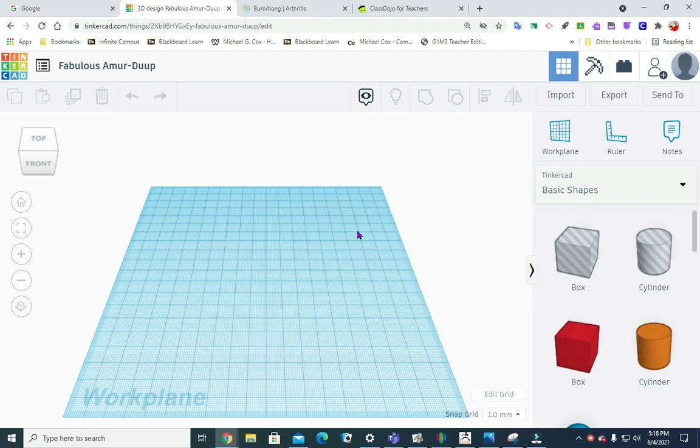But we're going to go create a new design. First thing we're going to do is go down to edit grid, and we are going to make it into inches. Then we're going to name it - let me double check. Nope, I didn't change it. Edit grid, inches, update grid. Then I'm going to go up here and name it, let's name it pillars.

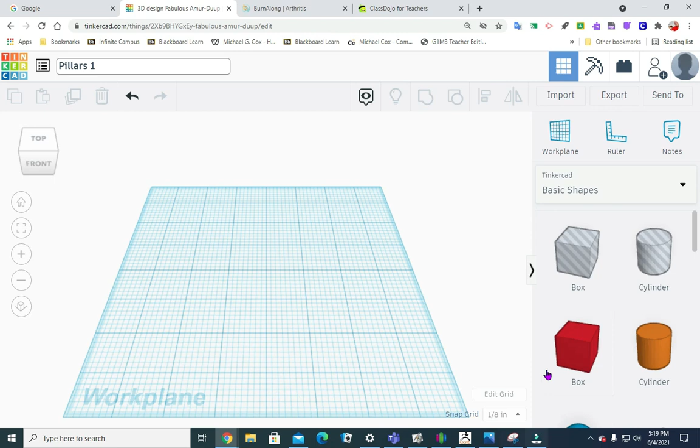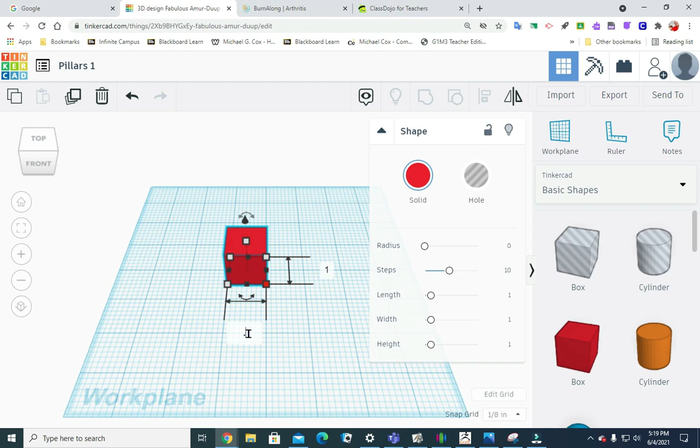I'm putting a 1 next to it because we're probably going to have to do multiple attempts at this. So we have the height of our pillars, and I am going to pull out a box. No, sorry, let's do our width first. It's a square, and it was 16 3/4 inches, which translated into 1 foot equals a 1/4 inch is 0.35. It's gonna be skinny. We're going to change both of them to 0.35.

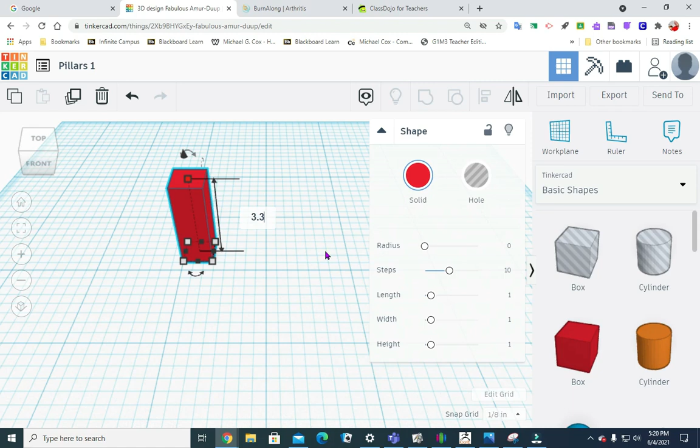Okay, now I'm going to roll in just so I can see better. It still is only 0.35 inches. The height is 3.3 inches. So now I'm going to have to roll out so I can see everything. So that is the pillar in and of itself.

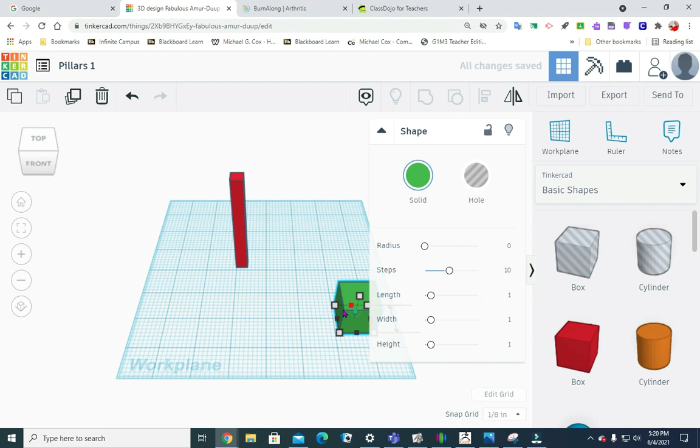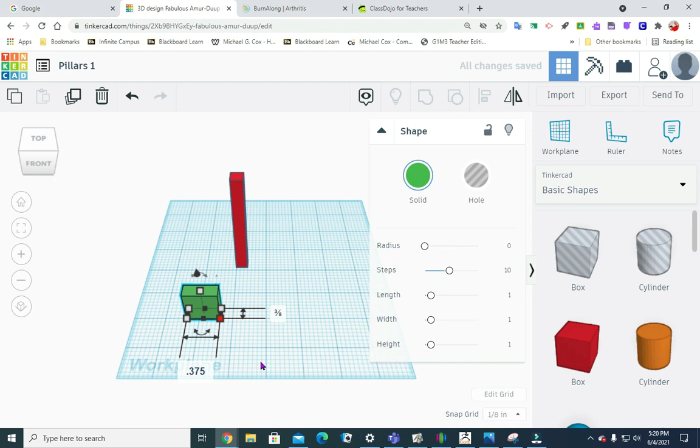Now what we need is to make the bases that go on the top and the bottom, the other little piece. So we're going to pull out another one. I'm going to change the color just so I can differentiate between the two. So this base is going to be 0.375 square. So it's 0.375, and I'm going to change this to 0.375. Okay, let's see, how tall is that?

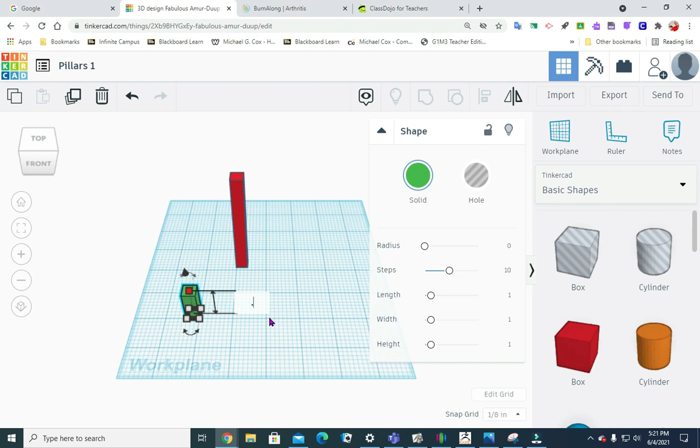We determined that was - let me double check here. Oh, I may be missing a measurement here. I'm sorry, it's 7 inches. So we're gonna make that 0.7 inches - so we are going to make that 0.15. Now it looks really tiny, right? It does, but in comparison, it is.

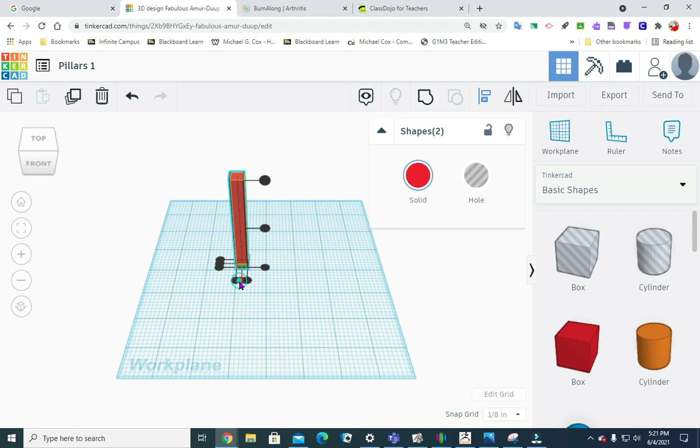So I'm going to pull this over, and I'm going to put it underneath that, and what I'm going to do is align it. Now I gave you those exercises to do - this is where the first one is. So we're going to click on the center. So we're going to click on it, and if you roll it out, see, it looks like that has the little finishing touch around the bottom.

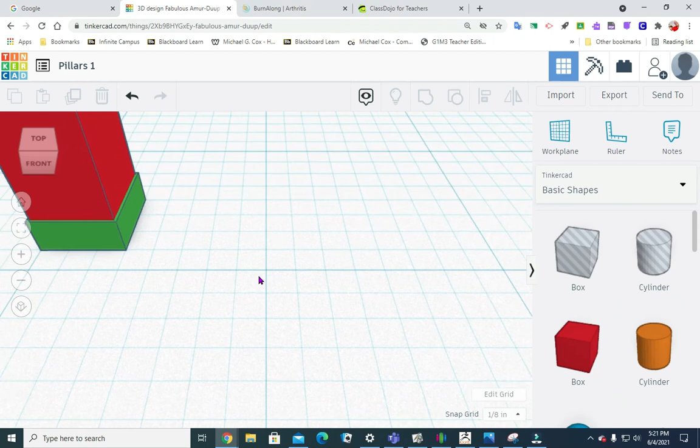I hope that makes sense. See, there's a little bit of difference - it's just a tiny bit, like a 25/100ths difference. So now I'm going to go down, and now we need to get one for the top, and let's make this green also, just so we can tell the difference in colors.

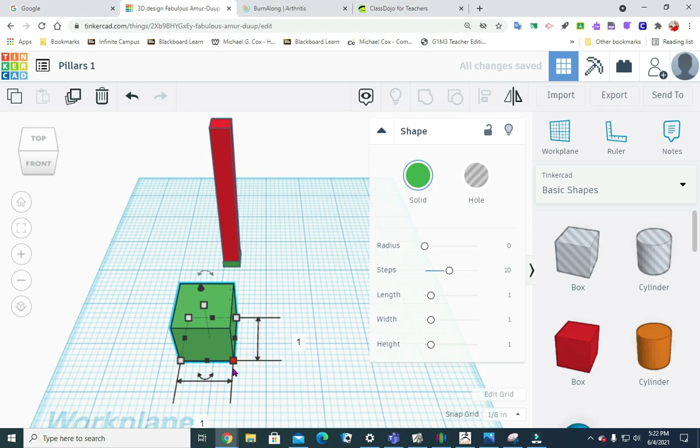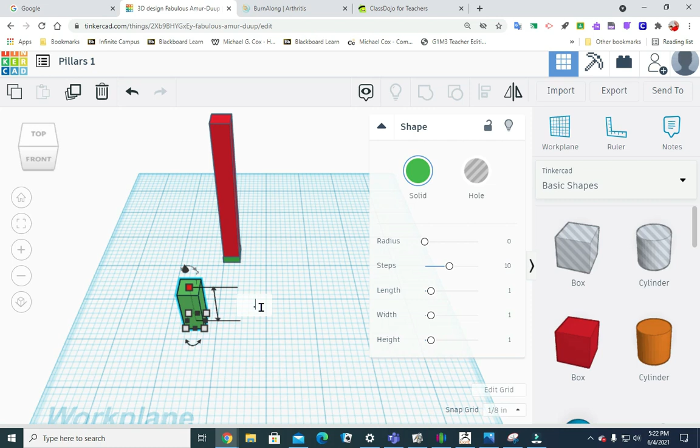I'm checking my measurements because I want to be sure. So I'm going to make this - so we'll make this 18. Same measurement, 0.375, 0.375, and that one was 11 inches. So we're going to make this 0.23. So it's almost a foot.

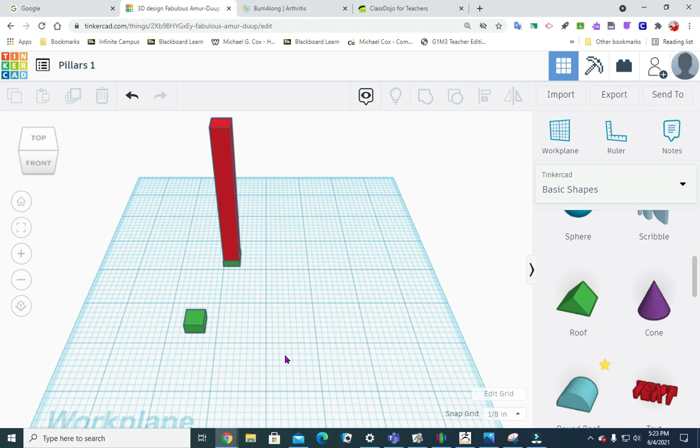Remember we talked about 1/4 inch equals 1 foot, so 11 inches is almost 1 foot, and so it's almost a 1/4 inch. Okay, now also this is a little fancier. I don't know if we have - I guess I probably do, but I think we're just going to make it a square. On the pillars itself, they actually have some kind of molding type deal to it. Maybe when you come to school on Monday.

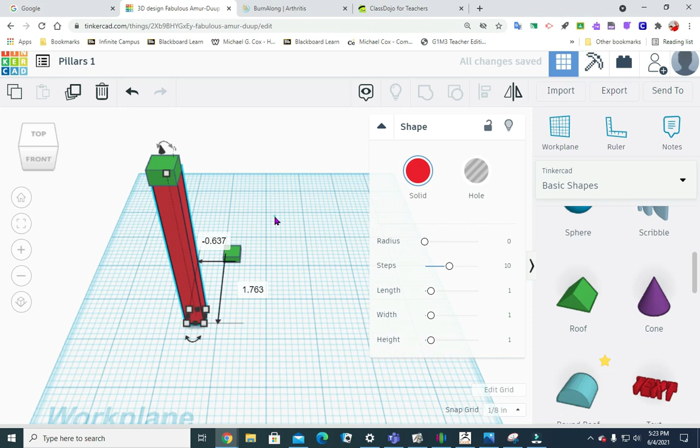All right, now if you see this little square right here, I'm gonna pull it off the ground. And we are going to make that 3.3 high, so it's gonna come all the way up to the top of the pillar. And then we're gonna align those up, put that right on top. Uh-oh, I didn't do it, so I have to start all over here.

So first thing I'm gonna do is group, click and drag over them. I'm gonna align them center, center, and then in order to move them together I have to group it. Then I'm gonna bring this over here, and I'm looking - I think I had this too high. Yeah, I have to bring this down, so I'm gonna bring it down 11 inches. Hold on here.

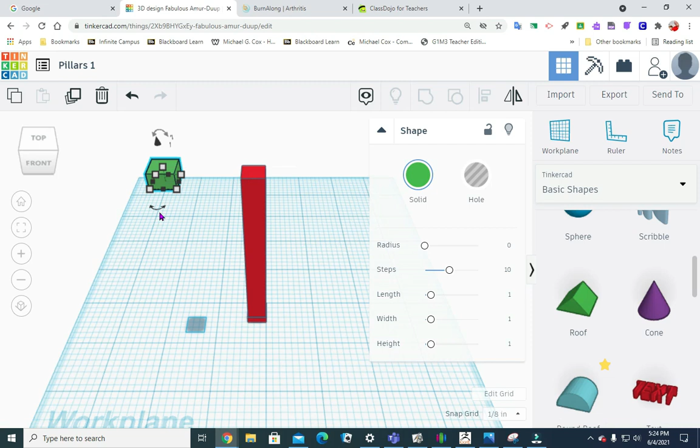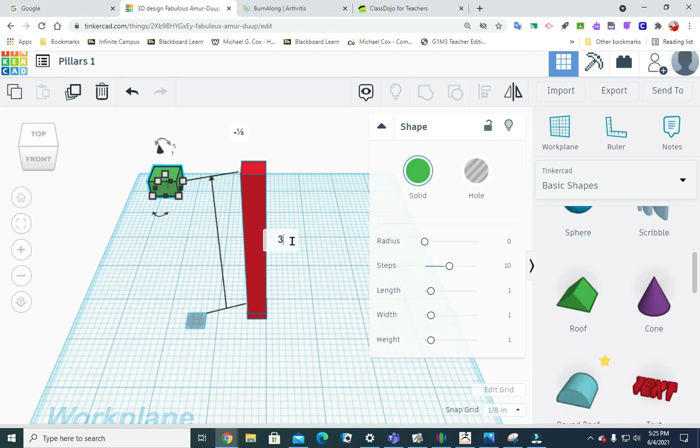It's not giving me my top. Oh, there it is. So I have to do some more math on this piece of paper here. So I have 3.3, and that is 0.23, so I have to do some subtraction. 2, that's going to be 10, so it's going to be 7. So we're going to bring it down to 3.07. Okay, now we should be able to line them up, and they're going to be the same.

They're going to line up, I believe. Let's look at the front view. Okay, so let's align them up. I'm going to go back to the orthographic view. I'm going to align them. Let me go to the top view. Let's see if I can get it better this way.

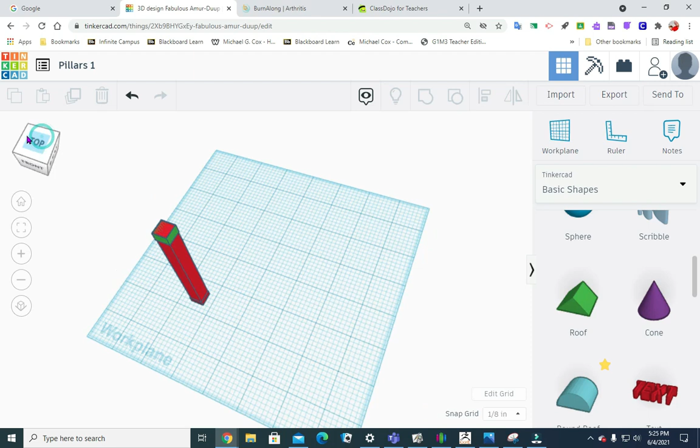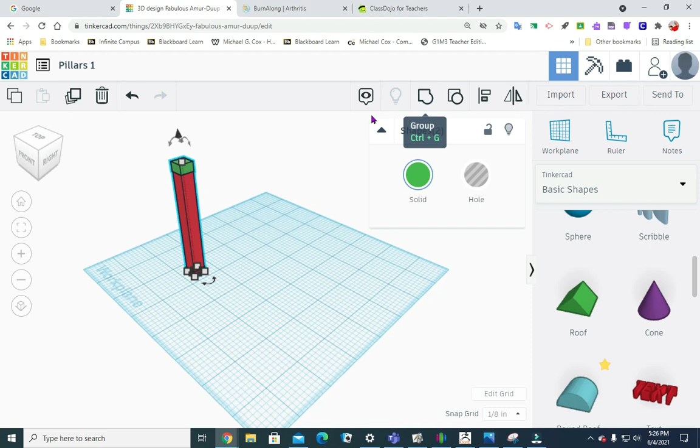Now I'm not an expert on this. How am I going to do this? Okay, I'm thinking here. So what I'm going to do, I am going to ungroup it. I'm going to ungroup this, and now I'm going to bring this over here, and let me group this one first. Let me align that one first.

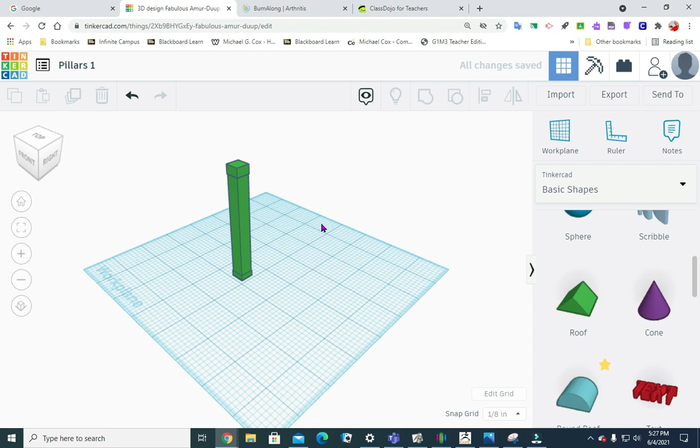So I'm going to put it here, the center, right? And now I'm going to bring this over here, and it's not going to let me group again, is it? Or did it do it automatically for me? It looks like it did, didn't it? It looks like it automatically did.

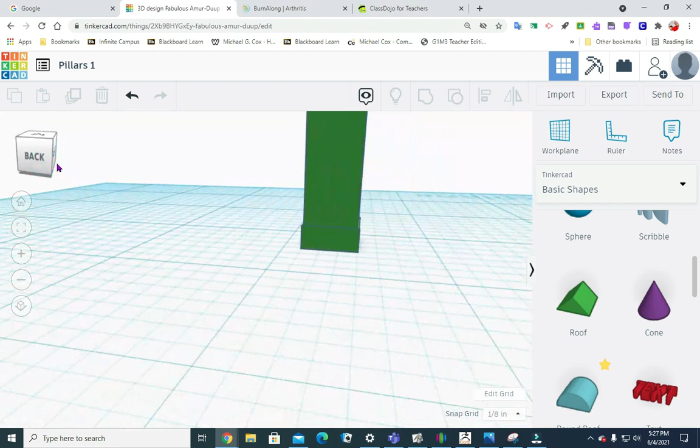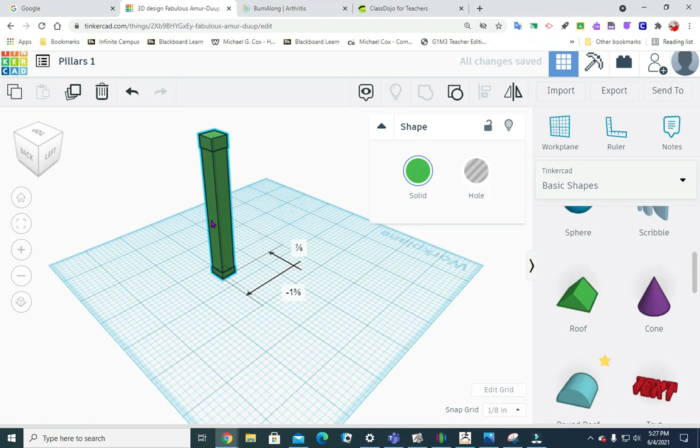I'm going to flip it around so I can see the other side. See, it does, it looks like it did it automatically for me. Alright, so I'm going to zoom out, make it smaller so I can see the whole pillar, and then I'm going to group them again. And what I'm going to do is put this over here, and I'm going to hit Control C, and Control V, Control V, Control V, and I get 4. Now I have my 4 pillars.

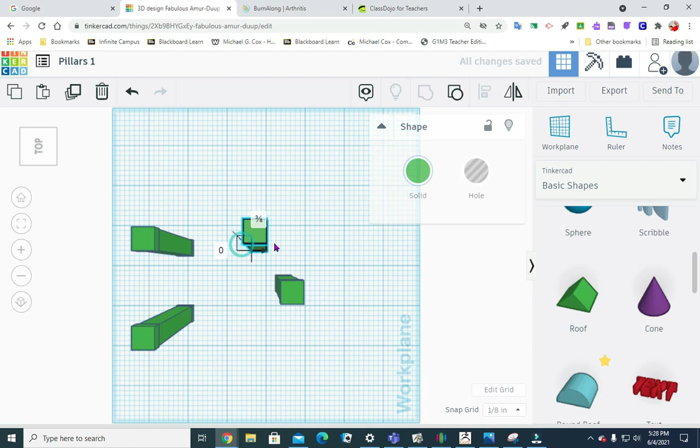Okay, and I'm going to get a top view. I want them to be kind of square because I'm going to print them here at home, and that looks like they look good, like they're separated enough.